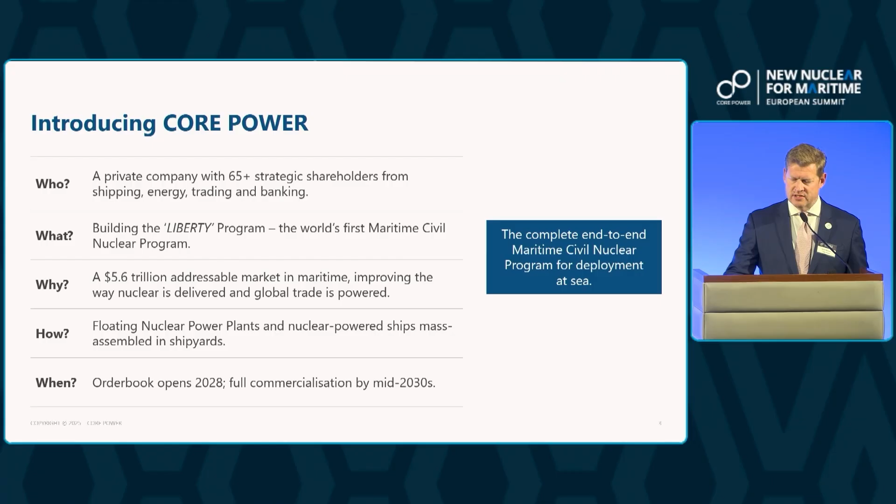Sitting in a port, this would be around 160 meters LOA. It's got about a 35-meter beam and a 6 to 7 meter draft, and it displaces about 25,000 tons. So in the grand scheme of things, it's pretty small, and it can sit securely in a sheltered location providing that resilient energy direct to customers. This is something that can be delivered on time, a specific date, and an agreed price directly to a customer.

There are hundreds of ports around the world that need to electrify in the next 10 years. And here's a solution that fits really well with a small footprint and really very little environmental impact at all. This is a huge market between now and 2060. The Russians are already doing it. And as Charlotte highlighted, it was done in the West as far back as the 1960s. So we know it works really well.

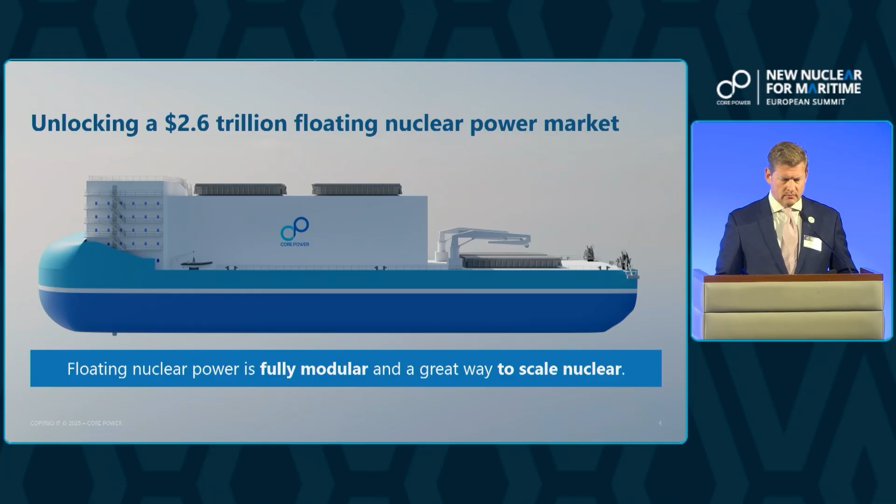But I think it's worth going back over the reason why these FNPPs, or floating nuclear power plants, are so critical. And it really comes down to a few things. How do you buy nuclear unless you're a regulated utility with a specific land authorization and the experience to build nuclear power plants? How do you actually get this stuff? How do big data companies, the AI hyperscalers we heard about, how does oil and gas, how does manufacturing and heavy industry get nuclear? Well, at the moment, they have to get it from their utility.

But with this new asset class, here is an opportunity to partner with those utilities, or even create the opportunity themselves to operate small modular nuclear power plants delivered on time and delivered on budget. Because it's small modular reactors, which is what everyone talks about. But the reactors themselves are always small and they're always modular. The hard thing about nuclear is delivering the whole power plant.

So we think it's less about small modular reactors and more about small modular power plants that can be delivered as a full product, like you would deliver an aircraft, like you deliver a complex piece of machinery that's serially produced as a product to market and not as a one-off mega infrastructure project. So all these power plants are quite small and they can be swapped.

The majority of human activity does happen on the coast, and that's really where the market opportunity for this comes from. If you take the OECD with the United States as the likely starting point, you take the UK, the Nordics, parts of the EU, the Middle East and parts of Asia, you've got a large market of opportunity here that can then be scaled beyond that as we go.

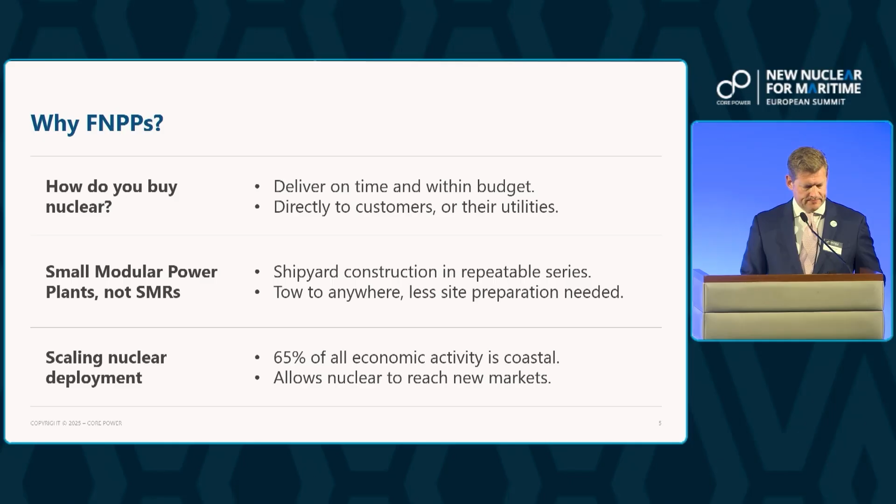Now, nuclear-powered ships. Nuclear-powered ships are a little bit more complex in the sense that, of course, unlike FNPPs, they're completely mobile. And mobile reactors is a hard thing to do when you don't have the backing of a nation state behind you. But that's what's now being unlocked, and that's what's starting to change with this new market. But the environmental impact of shipping is really only one aspect of this, however. If it's just about decarbonisation, we can move entirely down the road of using low-carbon synthetic fuels, but it's looking increasingly likely that the economics of these doesn't really stack up.

Slower ships carrying less cargo at a much higher cost will put immense pressure on our seafarers and on our workforce and make the industry less secure. That is not really progress. Shipping needs not only an economic solution, but also something that can improve the effectiveness of our energy use. And the only thing that can do that and can compete with the reliability of fossil fuels is nuclear energy. It's the only power source that can give us that massive energy density that we need for these large ships with true zero emissions.

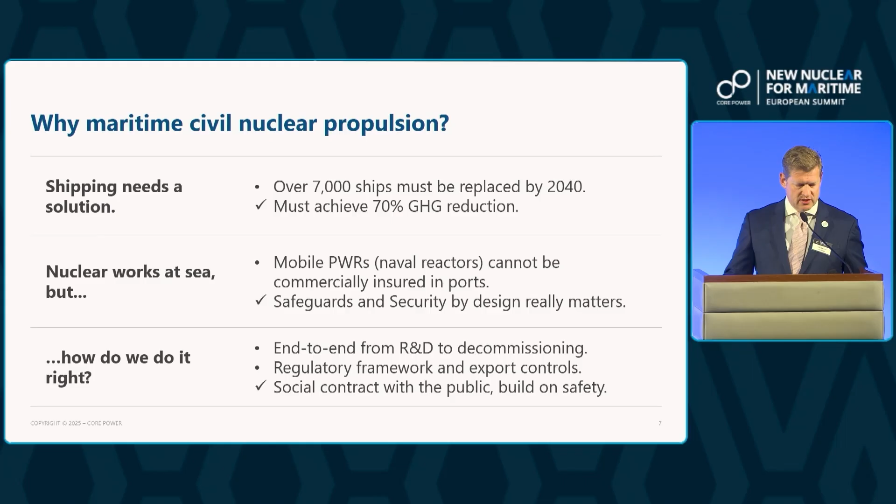We don't have to convince absolutely everyone that we can do this, but we do have to convince those that are where this starts. So that's the ports that will take the first ships, the nuclear corridors that will likely emerge in which they will trade, the customers that will use them, and the receivers that will take the cargoes that come off these vessels. So that's really the two key things to solve. It's insurance and it's social contract. But there are other criteria as well.

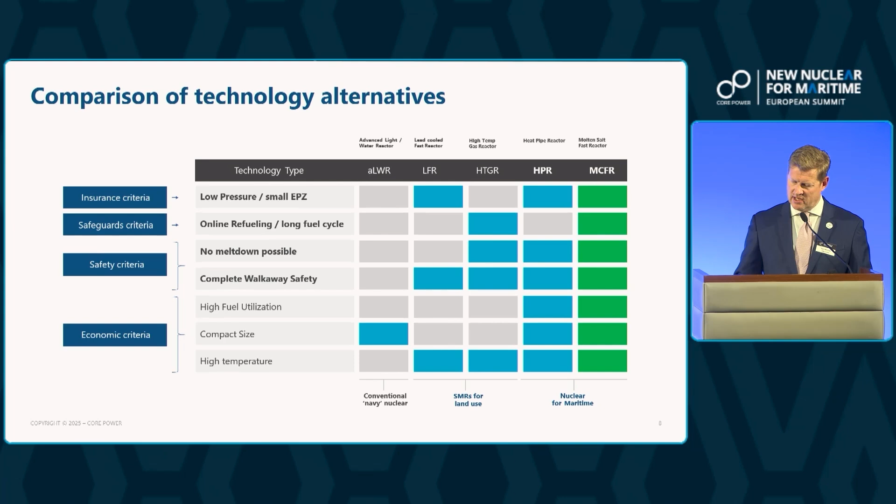And then you've got the molten salt reactors on the far right-hand side, and particularly the fast spectrum molten salt reactor, which meets all the criteria almost perfectly. It's a liquid-fueled reactor operating in the fast spectrum, low pressure, which leads to a small emergency planning zone, which you'll hear more about, and with a 20-plus year fuel cycle. And there's many other criteria you can apply as well, but really looking at this from a sort of logical technology perspective, this is likely the way that we get there. And we're going to hear more about the developments for both the heat pipe and molten salt reactors later on today, so I won't go into any more detail here.

The second important thing is export controls. As a result of the only existing nuclear propulsion program being the naval one, things have primarily been under military export controls. So we need to see that separation between military and civilian, so that maritime civil nuclear propulsion sits on the commercial side under the Department of Commerce and not on the military side under the Department of Defense. And the third thing, of course, is safeguards, which is absolutely crucial, and I'm going to come on to that in just a moment.

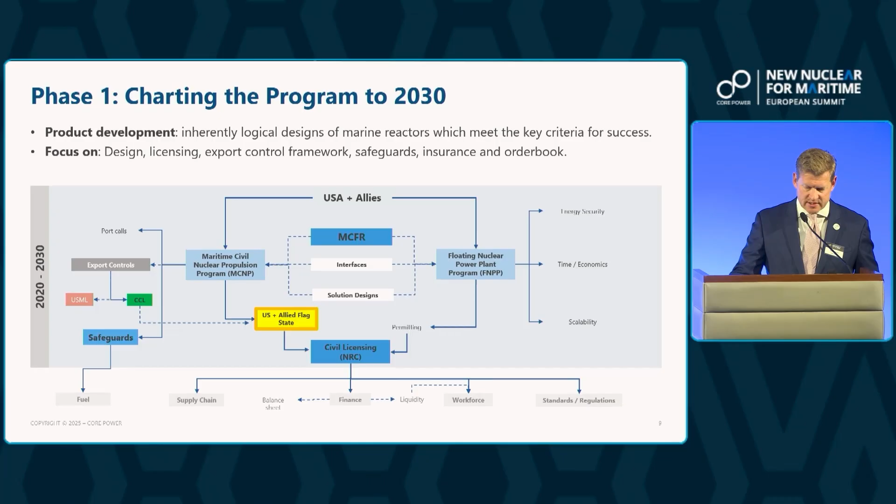Okay, then phase 2 of the program. So if you see those grayed out boxes at the bottom there, they follow through into phase 2. Once that product has been brought to market, it's really then building out the supply chain and the workforce. And that work has already started, or at least creating the conditions for this to happen. It's making sure as well that the final parts of the regulations come together so that we can then set up the manufacturing base. That's the shipyard that's going to fit out these FNPPs and these vessels.

It's about how we finance this. It could be through export credit guarantees, it could be through bank debt or equity, and also how the financing of any joint venture type arrangements could work. There's a large-scale amount of funding both available and also that has to be organised into each one of these.

And of course the workforce, setting up that program of education and of training, not just to the seafarers and other crew members, but those that are going to be the engineers, the managers, and the operators of the various technologies that we have here. We believe this is a career opportunity for a new generation of STEM students and engineers to come into a market of potentially high impact. And there'll be a panel, again, just before lunch that looks at this in more detail.

Regulations, well, that's something that's sometimes a little bit out of our hands, but what we've been involved in, instead of trying to influence regulations on our own as a private company, we've been part of setting up and joining forces with other companies in the market through an NGO called NEMO that Charlotte highlighted, the Nuclear Energy Maritime Organization. It's had a strong first year in operation and is in the process of getting NGO status at the 2 critical UN agencies that manage the regulations for nuclear and maritime. And again, you'll hear more from NEMO and some of its members later.

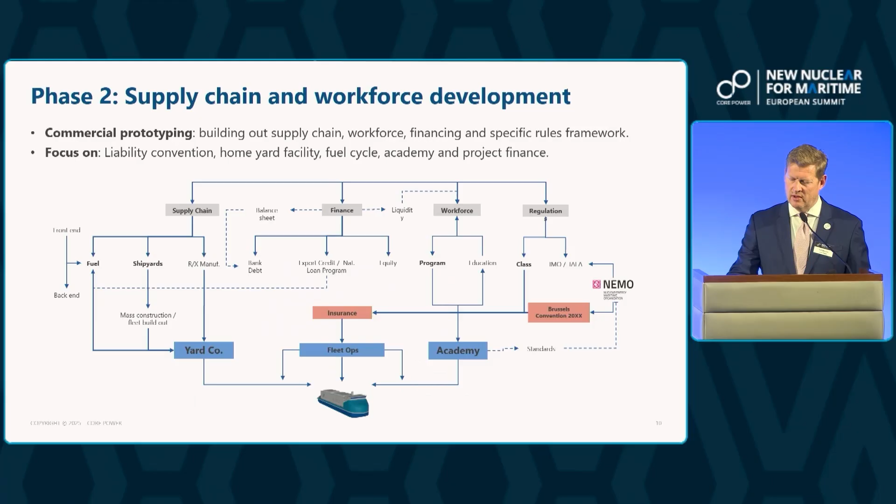But that factory, that home yard, the place that we will set this up is the one where ideally we'll have the manufacturing of the reactors, including potentially synthesis of the fuel, and the creation and the fitting out of that power pack that I mentioned that gets installed in both the ships and the FNPPs. Units without the power packs could be manufactured and put together in shipyards overseas, at least initially. So Korea, Japan, potentially some European yards would be involved in this, and those dumb assets, if you like, would then be towed or brought over by heavy lift vessel to the home yard.

And it's there that they're placed under licensing and regulations in that country. So if it's in the United States, a US flag we put on those ships, and NRC licensing would be done for those and the FNPPs, and they'll then be moved out from there. That's also where they'll come back to. This yard is where the assets will return for refueling, for maintenance, for repairs, servicing, and eventually also for decommissioning.

Now for the floating nuclear power sector particularly, this could be the home port for an entire fleet of FNPPs that can operate in other places around the area where that yard is located, and they can actually just simply be replaced instead of being refueled where they're working. This is kind of fleet optimization of nuclear power in a completely different way than we've thought about it before.

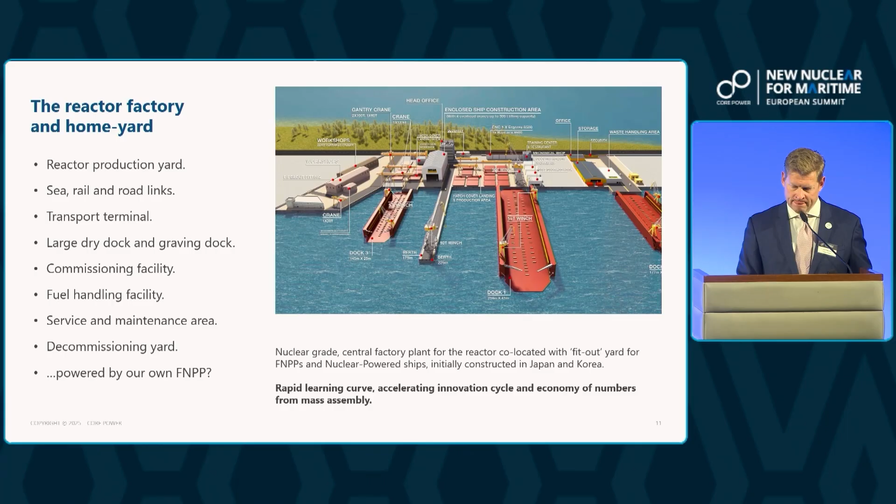Okay, phase 3. These assets are getting built, they're getting out into the market, we've now got the workforce to an appropriate stage of development, and the customers are now stepping forward. Customers will be able to take a lease on a nuclear-powered ship, so it would be controlled by a special purpose vehicle, an SPV, made up of a set of investors that are sitting there also as part of the program, and then leased out to customers. The big container shipping lines, large tanker companies, the big grain houses, etc., can lease these ships over the longer term, or they can be operated in a joint venture.

And here you're starting to get more into perhaps specific cargo operations. Say you have a mining company on one side, a steel mill on the other. You've got a supply chain then of iron ore moving between them, and you can then set up that joint venture with the shipper and the receiver using that value chain of the commodity, where really the ship just sits and operates in the middle as the conveyor belt between the two.

Floating nuclear power plants, it's the same thing. You can sell them to an appropriate utility. You can lease them out. You can operate them in a joint venture with a customer. Each particular project solution has an element of tailoring to it, depending on what the customer needs. And the financing of those SPVs that own each one of the units also depends on the individual customer. They could be tranched through equity, through debt, through financing provided by export credit agencies, etc. So there's a lot here.